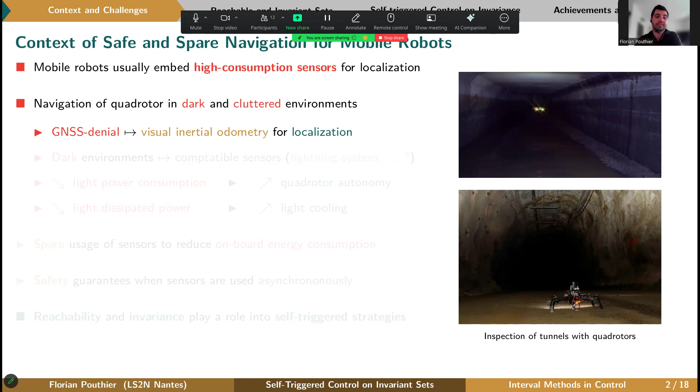In this navigation context there are lots of constraints. For instance, the GNSS-denied environment leads us to consider visual-inertial odometry for the localization of the quadrotor. Since these are dark environments, you must also find compatible sensors for this localization, which induces the need for some lighting system. And needing a lighting system means you must manage the energy on board the quadrotor with this lighting system.

If you want to increase the quadrotor's autonomy, you need to reduce the light power consumption, and you must also reduce the light dissipated power to improve cooling on the quadrotor and avoid overheating issues on board. This induces the need for sparse usage of sensors more generally, to reduce onboard energy consumption. And while using these sensors sparingly and asynchronously, you must also find some way to guarantee safety of your robot when you are not looking at the system measurement.

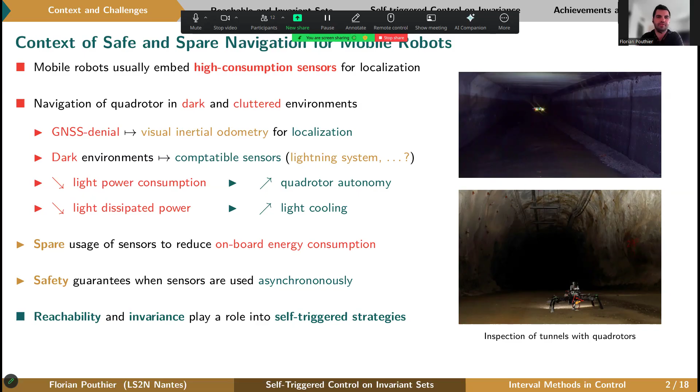This is why I want to show you in this presentation how reachability and invariance can play a role in self-triggered strategies for mobile robots. So let's start with the first part, on reachable and invariant sets for this purpose.

For the reachability of control systems, consider that the control system is described by some continuous-time ordinary differential equation. Then you define what we call a reachability problem, which here takes the form of an initial value problem based on an initial condition. What you want to do is solve this problem. Generally you will have the nominal solution, which is explicitly given by continuous-time integration.

But in the case where you have a control system with some uncertainties, your IVP is modified, and the initial conditions and disturbances are encompassed in sets. So your solution is no longer the nominal solution, but instead a set-membership integration, which provides you a tube like the orange tube you see in this figure.

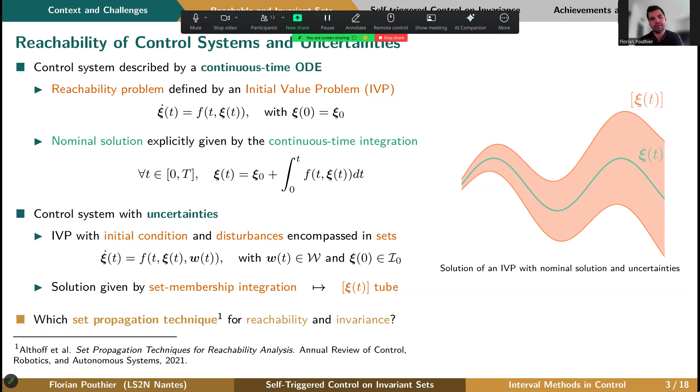There are plenty of set propagation techniques. In the work of Althoff, for instance, there is a survey of many set propagation techniques: intervals, boxes, polytopes, ellipsoids, and zonotopes. My particular focus in this work will be on reachability and invariance with polytopes.

So, the representation of polytopes. Computation methods on polytopes are powerful for analyzing constrained linear systems, and they are also convenient to integrate systems, especially when they are described by discrete-time linear systems. I will show you later that it is really convenient to have a polytope in such cases.

So what is a polytope? A polytope is a closed and bounded polyhedron, and it can be described using two representations that are dual to each other. The first is the H-representation, which is an intersection of a given number of half-spaces, and its dual, the V-representation, which is the convex hull of vertices. So we have both representations.

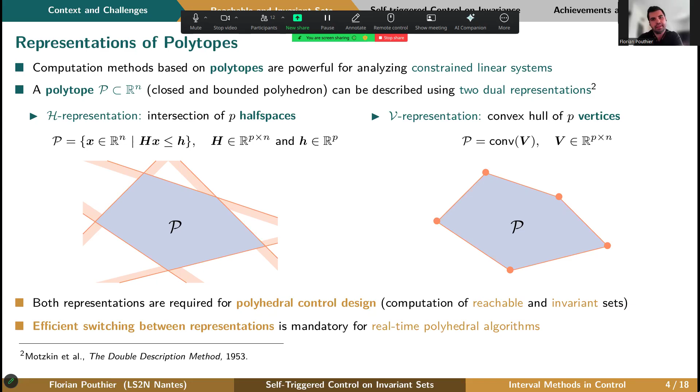These are required for polyhedral control design, and here they will be needed for the computation of reachable and invariant sets. We also need an efficient conversion between these representations for real-time polyhedral algorithms, since sometimes for certain computations you will require the H-representation, while at other times it will be more convenient to have vertices. What I want to say is that you have to find tools, or develop them, to handle this constraint of switching between representations when deploying your algorithms onboard mobile robots.

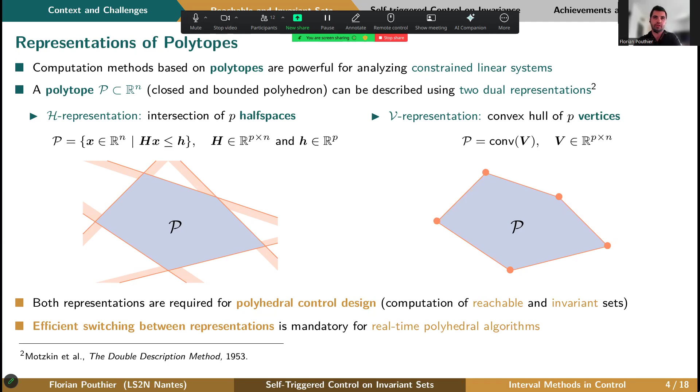Here the disturbances are contained in the polytope, since this is the representation we have chosen. You can also consider that the initial condition belongs to some initial polytope. And what we can do is build a forward reachability map of this system, which is a open-loop disturbed system.

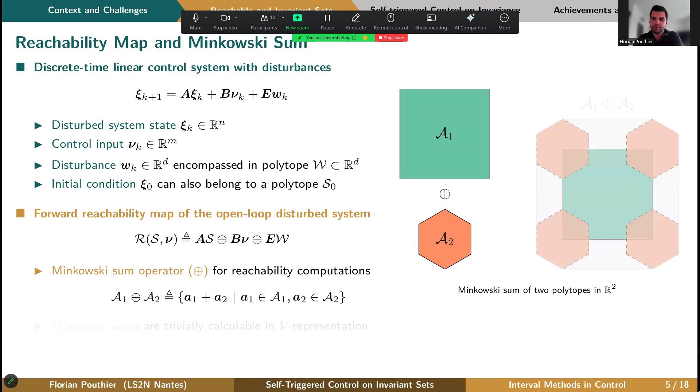What appears here is some operator, the Minkowski sum operator for the reachability computation. So given two polytopes A1 and A2, if I want to sum them with the Minkowski sum operator, I take the A1 set, then the A2 set on the vertices of the first vector, taking the convex hull of this figure.

You can graphically see it as moving the A2 polytope along the border of the A1 polytope, then taking the convex hull of this part. By definition, since you have an operation which is a set of vector sums, these sums are trivially calculable in the representation with vertices.

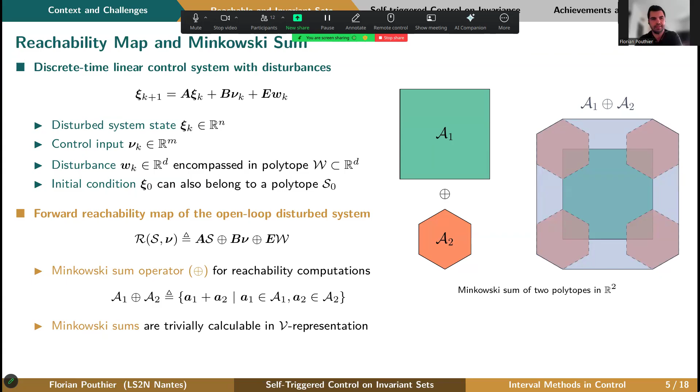You can extend the reachability to multiple steps. So you have a recursive construction of your reachable set. If you take some RK, the polytope at instant K, you multiply it by the state matrix evolution, add the disturbance polytope that can occur at this time, and then take the convex hull to produce the next reachable set of the system.

This recursion will produce a convex, compact set, and you will have a sequence of polytopes. So here, for instance, is a reachable set sequence for a double integrator. You'll see this type of case again later when we consider the quadrotor, since you can linearize the quadrotor as a double integrator. I'll come back to this later.

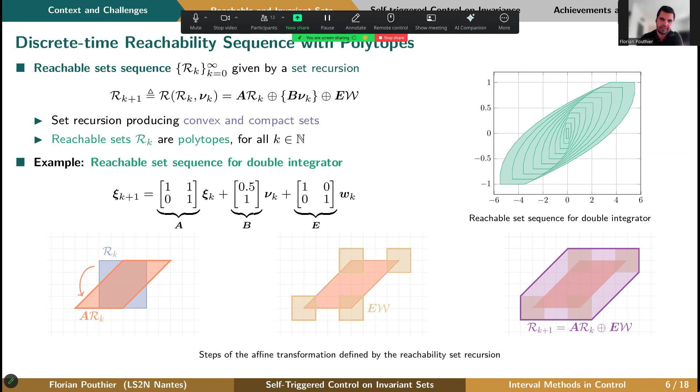Now that we have discussed reachability, let's talk about invariance. But to talk about invariance in a control system, you need to apply some state feedback to your system, in fact to obtain a closed loop discrete system. You will choose some state feedback with a feedback gain, selected to ensure the system stability.

This is the requirement to compute invariant sets for your system. So you now have a new forward reachability map, which is a reachability map for the closed loop system, and then you will be able to compute invariant sets.

By definition, a set is an invariant set if, when you apply the forward reachability map to this set, the result is included inside this set. To make it more understandable: if you consider some state trajectory initiated inside the invariant set, then it will remain in this set forever, if you apply the closed loop state feedback, whatever the disturbance within the bounded disturbance polytope.

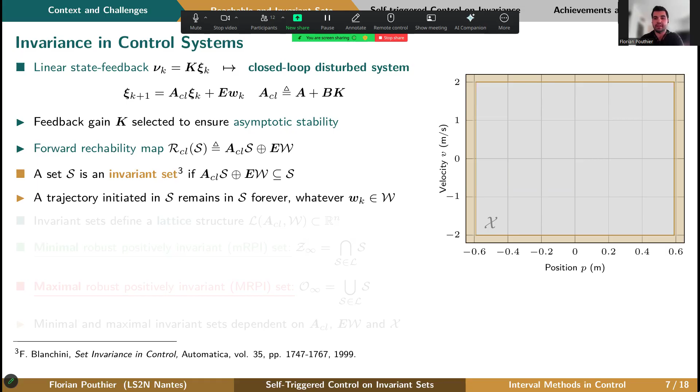So you don't have only one invariant set, you have plenty of invariant sets. In fact, in state space, the group of invariant sets defines a lattice, and you have some ordering of the invariant sets.

For instance, you have the minimal invariant set. If I take the intersection of all invariant sets inside this lattice, I will fall into the minimal robust invariant set. And if I take the union, the maximum of all the invariant sets, I will arrive at the maximal invariant set.

What we have to understand here is that the minimal and maximal invariant sets depend on the closed loop state matrix, the polytope of disturbances, and the state space, the constraint space.

And here you have a minimal invariant set which is not the origin itself, since you have some disturbance polytope which is not empty. So by construction you will have some minimal invariant set. Also, you will have a maximal invariant set which is not the full space R^n, since you have a space constraint X which is contained inside the whole space R^n.

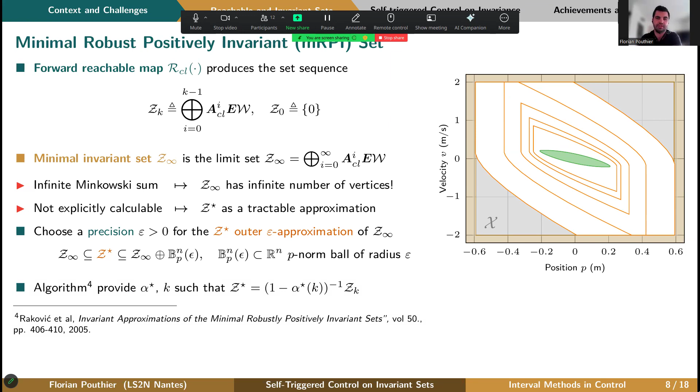For the maximal invariant set, what you want to do is find all the state trajectories which satisfy the state space limit of your constraint set X. For that, you will take the backward reachability map. To understand that, you have to think: from which part of the state space function can I come to lie into an invariant set?

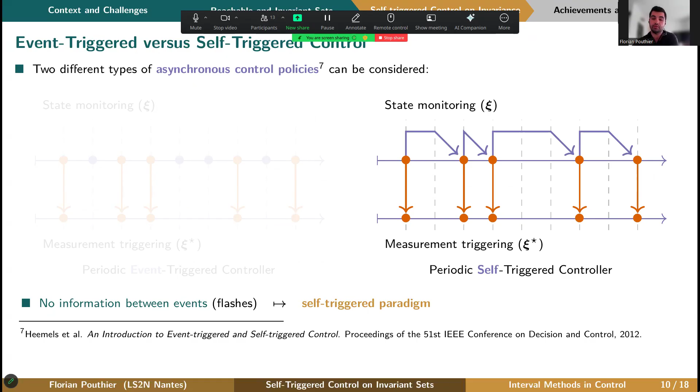So some definitions of the self-triggered feedback. A self-triggered feedback is defined by two functions. It is defined by an event function, which will indicate if a control update is needed or not, and a feedback function, which defines the applied feedback at events and between events. So it is quite reasonable to assume that at event instants, since you have a new state measurement, you will apply the state feedback with the accurate measurement.

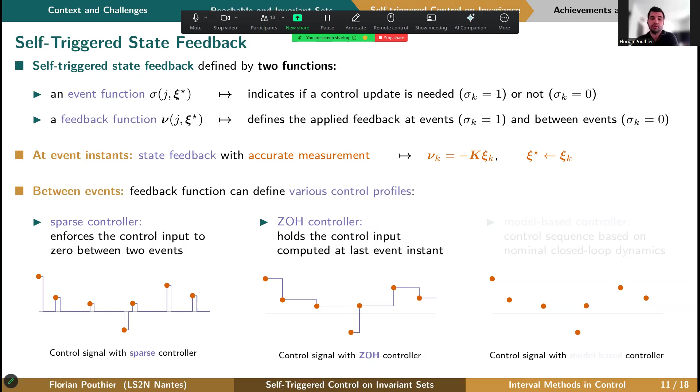And between events, you will define some feedback function, which can take various control profiles. In the literature, we have two types of feedback function. We have a controller where the feedback function will enforce the control to zero between two events. You just apply the state feedback at the accurate measurement instant, and then you send zero to the controller. Another way of doing the feedback function is with a zero-order hold. You hold the control which has been computed at the last event instant.

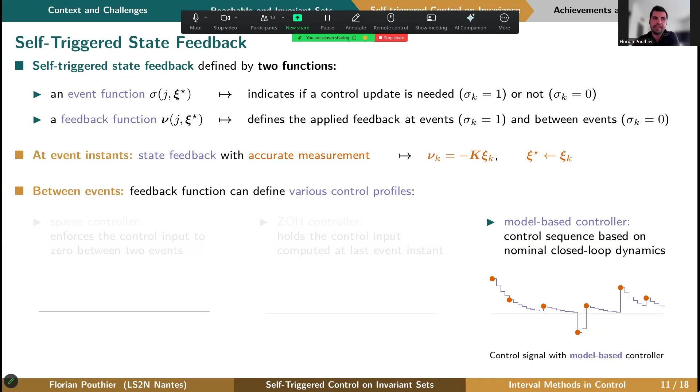And you can even do better if you have some knowledge of your model by applying a control sequence based on the nominal closed-loop dynamics of the model. So in this work, I will consider a model-based controller since we assume that we have some knowledge of the model of our system. So we have all the bricks to build our self-triggered stabilization strategy based on invariant sets.

So our self-triggered controller acts that way. Between two events, what you will do is let the system evolve freely. At the same time, you are computing the sequence of reachable sets with the self-triggered control. So you have the summation with the open-loop matrix, and you also have the nominal closed-loop system on which these sets are controlled.

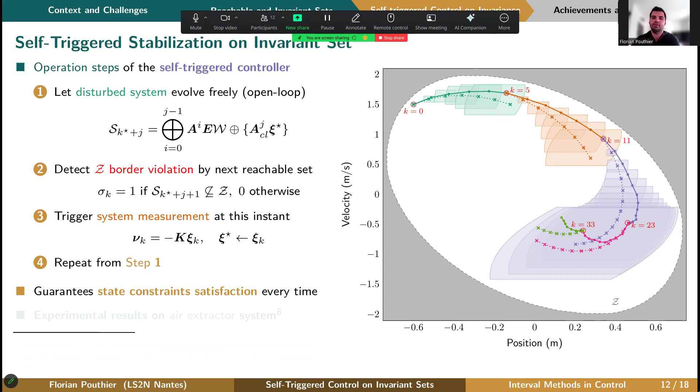And this strategy will guarantee state constraint satisfaction every time, and that your system state remains inside the invariant set at each time, since you are taking the system measurement at the right instant, before some possible state of the system lies outside the invariant set. So the invariant set is defined as some state set in which I want to remain to have the guarantee that the system is stable.

And we have some experimental results on this strategy to validate this theoretical strategy. So now we can apply this strategy to our mobile robot of interest. So this will be the quadrotor. As I said before, it is quite usual when you want to use linear tools to linearize the quadrotor model around an equilibrium point.

And basically, what you are assuming is that you have your quadrotor with an attitude loop, which assumes that your angles are reached sufficiently quickly to have an attitude loop which is stable. So you only look at the position and velocity behavior of the system, which is related to the angle and thrust commands. So that's why you have a linear model that you can discretize. In general, for quadrotors, we have embedded controllers that are running at 100 Hz.

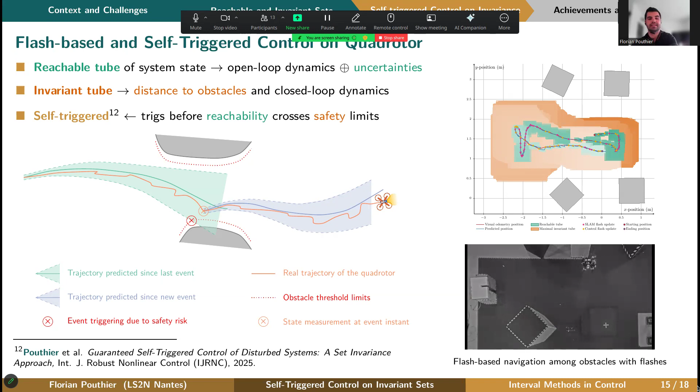Okay, so some conclusions on the achievements and the perspectives of this course. So we managed to have a self-triggered navigation of the drone based on flash-based images in the context of the Dark-NAV project. So this is safe navigation in the dark and GNSS-denied environment. The main achievement is to have energy harvesting and the overheating prevention on board. And more methodologically, we have a framework for safe navigation of robots.

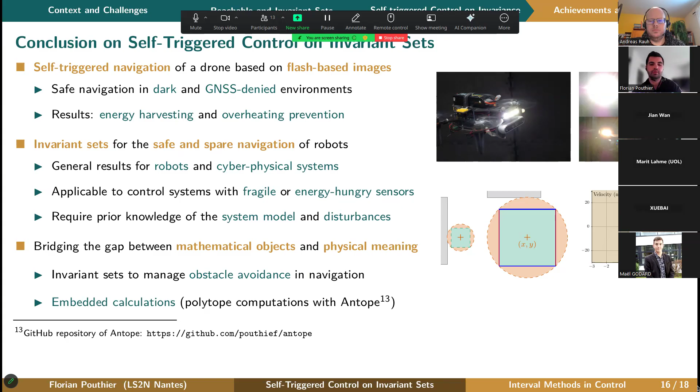And also another thing that I did not mention before. Since you have the real-time management of representations of polytopes for the embedded calculations, you need some library of polytopes, and I'm currently working on a library which is still in development, but hopefully 2026 will be the year of the first release of this library.

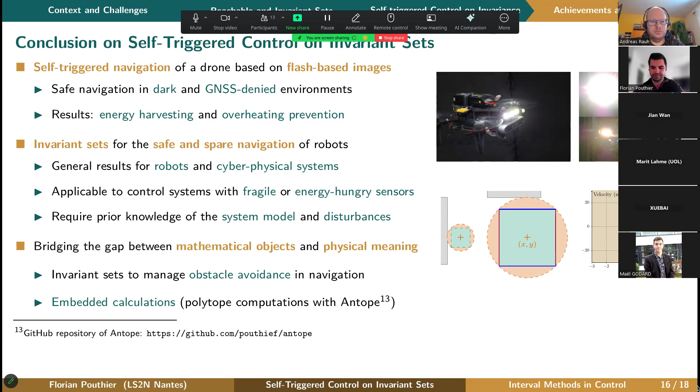Some perspectives. From the Dark-NAV project point of view, one perspective would be to handle more complex environments, for instance outdoor caves or tunnels, and enhance the guaranteed teleoperation, considering a teleoperation case with a remote operator and the trajectories. More theoretically, I want to investigate the controllers. We have seen that for the moment on the quadrotor, the controller is given by some linear quadratic regulator. So maybe it would be interesting to also consider the minimal invariant set within the controller.

And also the autonomous navigation, with safe path planning, using the invariance to generate safe trajectories beside the obstacles. And we can also go towards more mobile robots. For instance, taking the example from multi-agent systems, how multi-agent systems can communicate together with the least information possible. So it's also linked with self-triggered control, and extend the flash-based strategies or self-triggered control strategies to other types of vehicles, underwater vehicles, terrestrial vehicles, and so on.

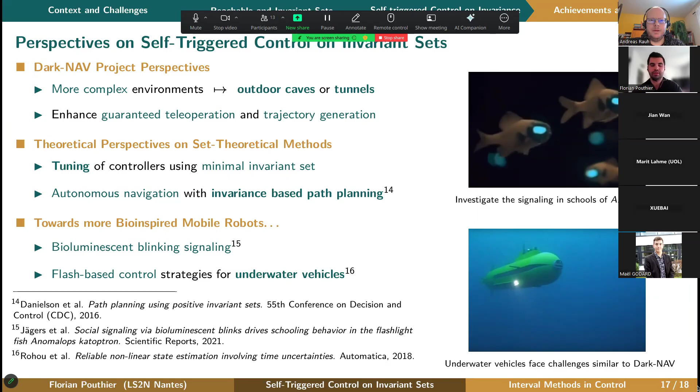Just unmute yourself and go ahead. If not, I have a list of 4 questions on my sheet of notes. I would firstly like to start with the slide number 12, where you mentioned the state measurement.

Yeah, and what you are doing at the moment is you're measuring the complete state. Have you already thought about integrating something like an observer or state reconstruction scheme in an optimal fashion into this procedure, where you're also doing something like an event-triggered state reconstruction? For example, the works that Nassim Ramdani is doing with an event-triggered state estimator. I think this could be fused quite nicely also to reduce, if you do not have full state measurement, also the effort for state reconstruction.

Yes, definitely. So from a theoretical point of view, what we first managed is just to say we have no information on the state between two measurements. In fact, this is quite false, especially on quadrotor, since you have some measurements that are available and that are not energy consuming, which are the information coming from the inertial measurement unit. And this inertial measurement unit is giving you measurements of angles quite for free, I would say. So yes,

definitely, I'm working here now to end the Dark-NAV project, and we are moving towards this type of strategy to also have some information between the updates coming from the inertial measurement unit that could be integrated to improve the knowledge of the system between the updates. So yes, technically, this is something that we are currently considering.

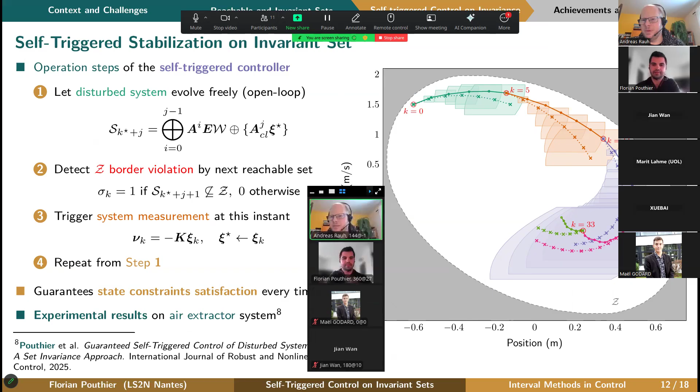Yeah, okay, many thanks. And the other question that I have was in this backward reachability analysis that you had on the slide number 9. Because if you have designed a state feedback control in forward direction, which is asymptotically stable, the inverse direction represents unstable dynamics. That means if you have the matrix A_CL having all the eigenvalues within the unit disk, the inverse has the eigenvalues outside.

Does this impose any, let's say, implementational restrictions concerning the efficiency of the backward evaluation? Do you need something like domain splitting procedures? I'm seeing that Jian is here in this talk, and he also proposed a couple of months ago in one of our previous seminars strategies for splitting zonotopes, for example. Do you need something like this in order to get tight enclosures for backward propagation, or do you just apply the backward map naively and do the calculation here of the Pontryagin difference, and that's all?

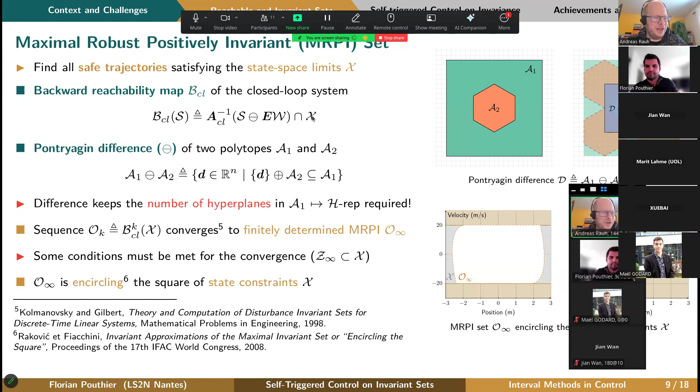Yes. So in fact, you're right. This backward reachability map will create a sequence of growing sets, and you need some way of restricting them. The way you restrict this growing behavior is with the intersection here. I don't know if you see my cursor. The intersection with the X constraint set. By taking the intersection with the X set, you restrict the growing behavior. Okay, that means the intersection is already doing the job of limiting the blow up. Yes, exactly, it's limiting the blow up, and basically in polytopes it works great to have this type of intersection by taking the half-space representation. Yes, definitely.

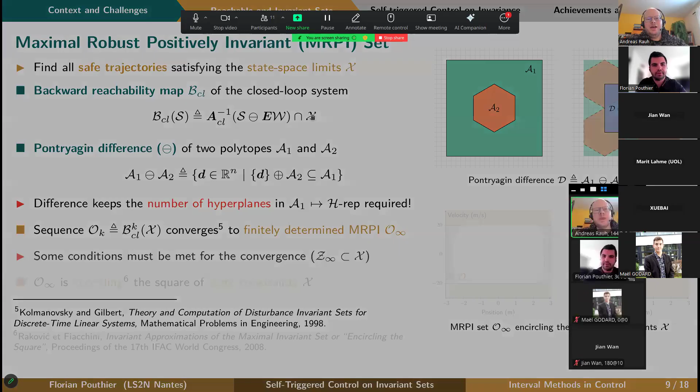Have you considered also scenarios where you know a priori that the disturbance is bounded but constant in the bounds? Would you then move the disturbance to a further component in the state vector and insert this as a discrete time integrator? Or what would then be your procedure? Because then your method is more pessimistic than necessary.

Yes, obviously, it's overestimating since you have this set, this polytope which is constant basically. It does not change along the experiment and along the use of the quadrotor. So I don't have a procedure for the moment, but I think it would be interesting to manage the case where you have some more sensors, for instance, disturbance sensors that could be, on quadrotors, an air gust sensor, like a pitot tube or something like this, to change the shape of this polytope. So it's not something on which I'm working for the moment.

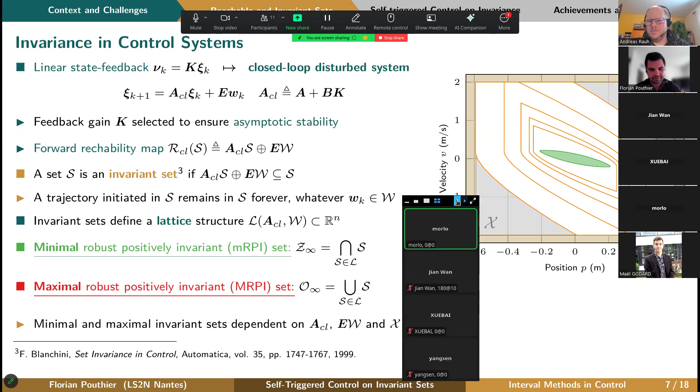I was wondering, Florian, if you could explain how you choose the number of edges in your polytopes. Yes. So actually, I don't choose so much the number of edges of my polytope. The fact is that here, in a second order system, I have a disturbance polytope with 4 vertices, and then maybe I can just go to the reachable sequence.

So here my polytope of disturbances has 4 vertices, but when integrating the reachable set sequence, the number of vertices will increase, since you multiply by your state A matrix and add this disturbance polytope. So what you are seeing on this sequence of 10 time sets is reachable sets with a growing number of vertices. And of course, you hope that the self-triggered controller at some time will trigger a new update to come back to an initial reachable set with 4 vertices. But yes, for reachable sets, this is the growing number of vertices.